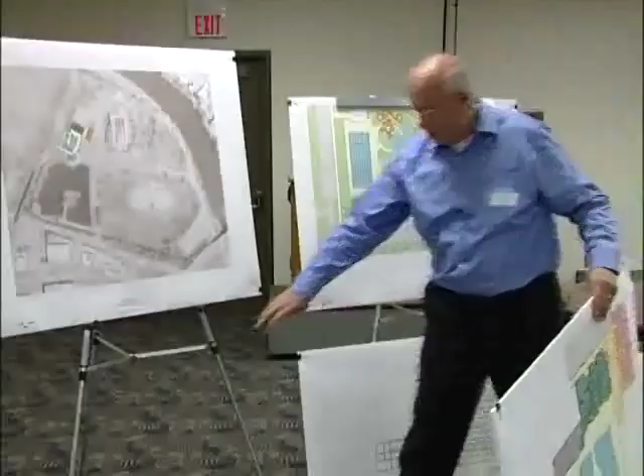As Donna said, we have 6 sites to go through. I know this will be hard to see, so I'm going to move this a little bit over to the center. Afterwards, you'll have a chance to come up and look at them closely, so if you can't see real well right now, you'll be able to in a bit.

The first one I'll start with is McCormick Park. There's a master plan that's been done for the park—that is this drawing here—and we are honoring that master plan with the work that we're doing.

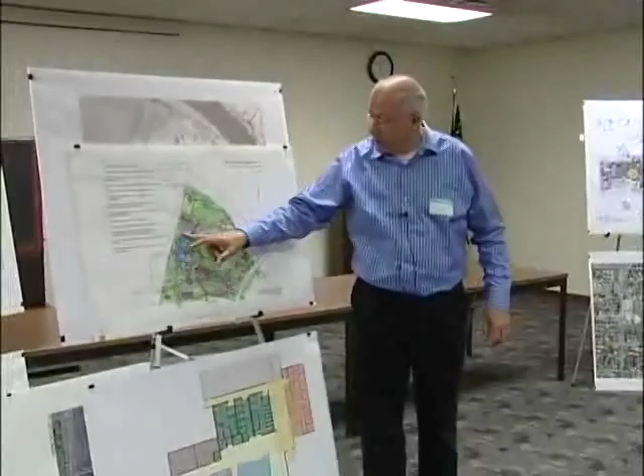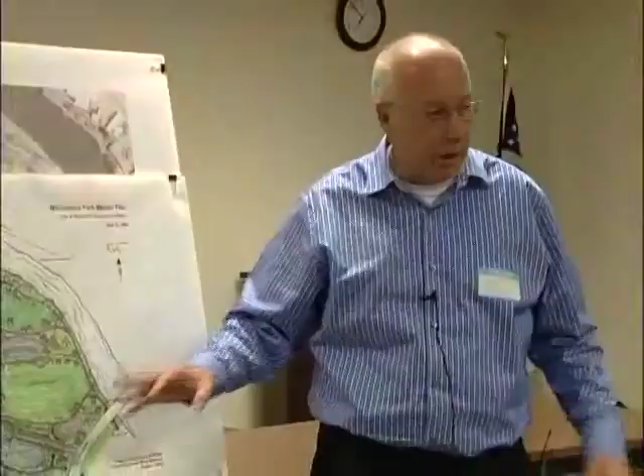The master plan indicates that just north of Silver's Lagoon is a site for a community center to be constructed, so that's the site we're working with. The reconfiguration and work of the park is not part of the work we're doing right now, but we're trying to respect that in the work that we're doing.

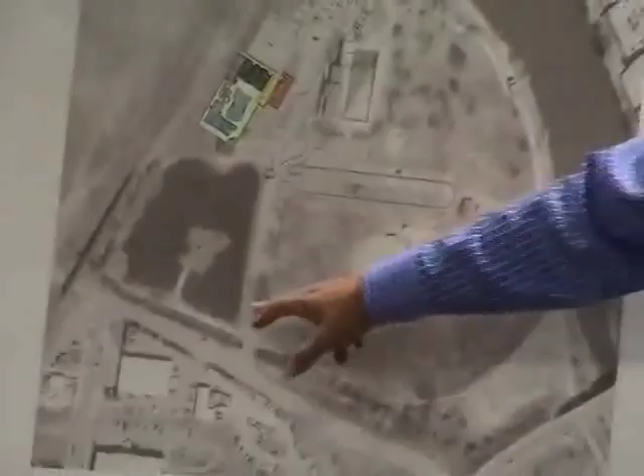So this is an aerial photo of the park the way it looks today, Silver's Lagoon. And here's the site to the north of Silver's Lagoon that we're building on.

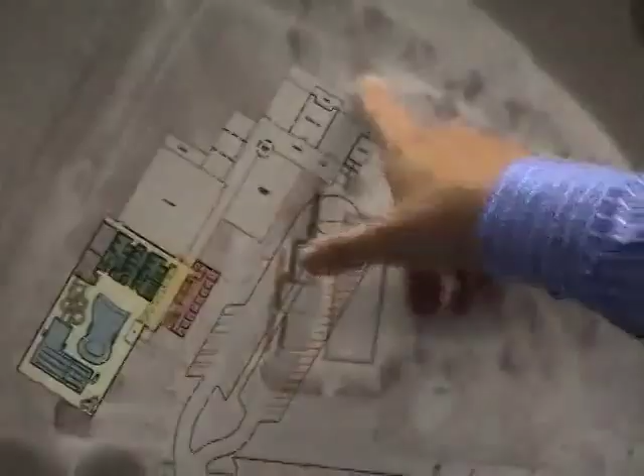Now this is a multi-part project, the community center. Right now in the aquatics referendum, there is money to fund an aquatics portion, but there's a vision of this being quite a bit more of a building in the future, with future partners coming from nonprofits and the private sector to partner up with the city. So what you see in gray is just a diagram of the potential for what can come later, and the colored is the part of the project we're doing now.

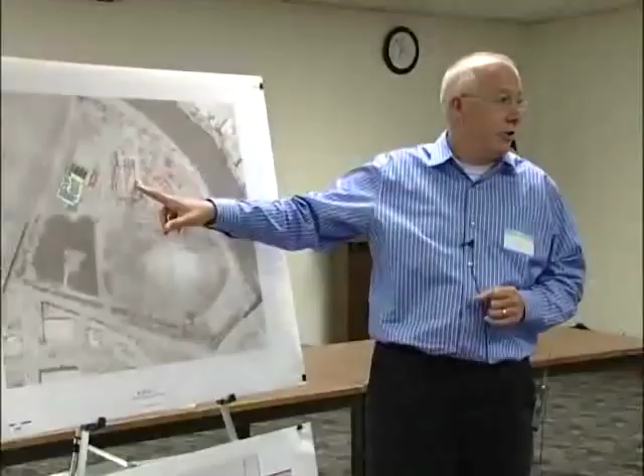So we've tried to work out some parking ideas about how parking will work in the future, using the existing asphalt and taking over some of the space where the current McCormick Pool is, because we want to preserve as much of the green space that exists today on the park.

So essentially, if you come into the park from here, the first piece you'll come to is the aquatic center. We've tried to locate it so it has a connection to Silver's Lagoon, with the indoor water features relating to the lagoon to the south. And then the future community center will spread up this way with a combining street or commons area. We've done some work on that even today.

But the major components we see in the future are the Children's Museum, a gymnasium, a cultural center, and the Boys and Girls Club, all of whom have expressed interest in being partners in the future as they raise funds and can be involved in the project. But for today, the major thing that we're doing is the aquatic center.

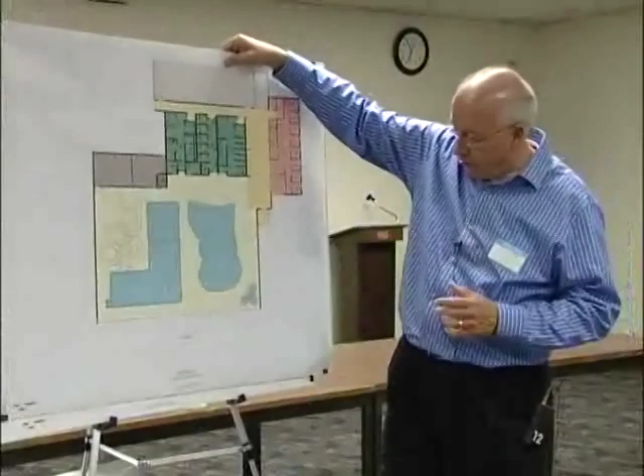So if you can remember from that drawing we just looked at, Silver's Lagoon is right down here. The aquatic center is about a 30,000 square foot building. It has two major components: the Parks and Rec department offices will be located here — this is going to be really the signature Parks and Rec facility for the community — and then a large indoor aquatic center here.

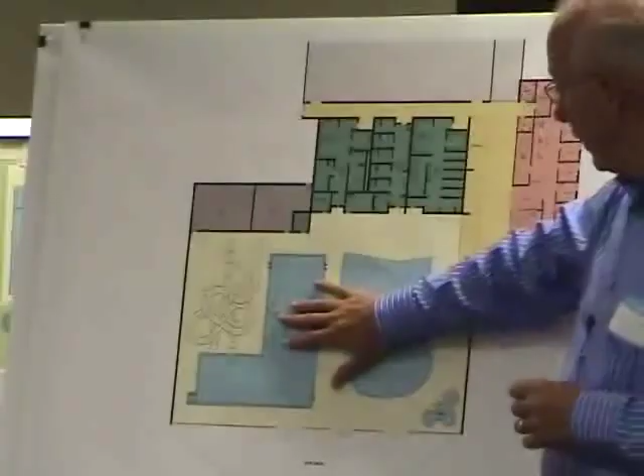As you come up to the building, you'll come from walks somewhere here into doors into a commons or lobby space right here. And the first thing you'll see as you come into the building is a view into that new aquatic center. We want to show off this exciting space right away.

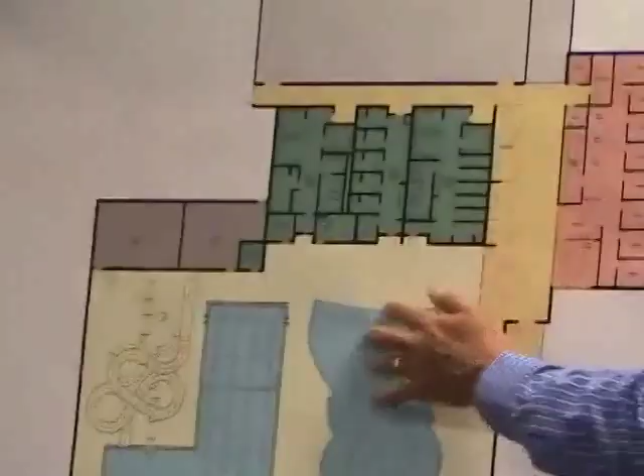And there's a place here for parents or visitors to sit and have a refreshment and then look out into the pool, particularly a good spot for parents who are bringing their kids in for swim lessons. They can sit and have a cup of coffee while the kids are doing their lessons.

This is the control desk. This is really the place that is the anchor for the whole facility, keeps track of everything that's going on. So if you're coming to swim for a day and you've got an annual membership, you might show your card. If you're coming just for one day, you'll pay your fee to come in, and then you'll pass into the locker room area here.

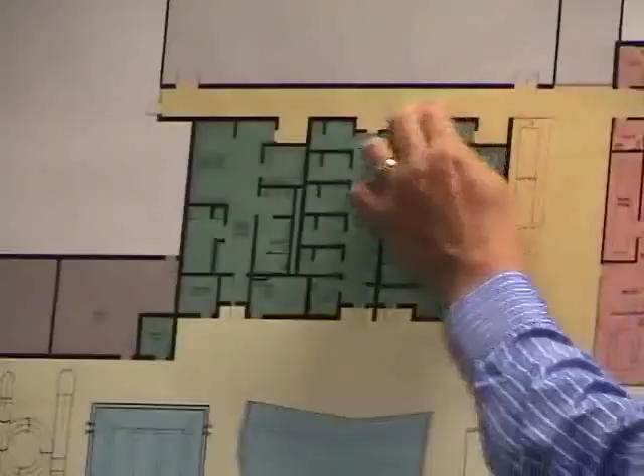We have three kinds of locker rooms: a women's locker room, a family locker room, and a men's locker room. The women's and men's locker rooms are ones like you've all seen before, but if you're not familiar with a family locker room, what they are is private changing rooms and showers.

We have 5 of them, so a family can go in — a mother can take a small son, or a father a small daughter — and not have to bring them into the men's locker room or the women's locker room. So these are private changing places right here, and then those feed directly into the aquatic center.

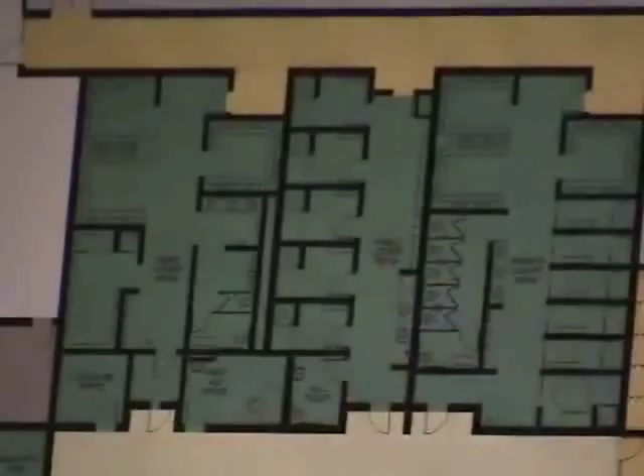Now the aquatic center is made up of perhaps 4 parts. This is the leisure pool, and if you haven't seen those, this is what's called the zero depth entrance — a beach-like approach to the pool that just simply slopes into deeper water. This will be filled with different play features, things that spray water, dump water, squirt water, things like that for the kids to play with, scattered in this area.

And then right here is what we call a current channel, so you can float in moving water. It'll kind of spiral around this.

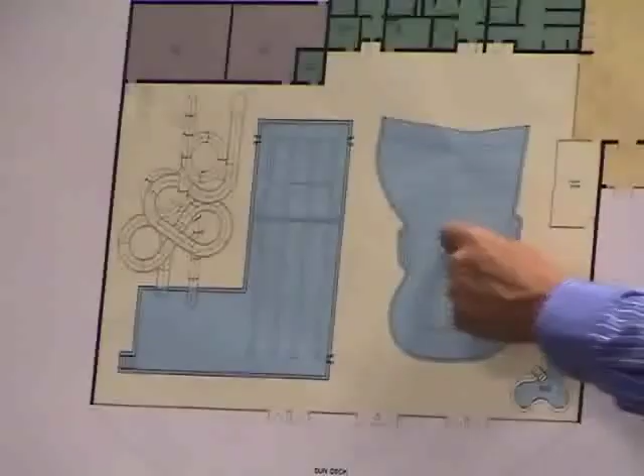And in the center is another place with a little bit deeper water, something like this deep. So we go from the beach to about 3 feet deep of water, with places to get into the pools there.

Then we have a spa in the corner, and this is really for the grown-ups. While the kids are playing in here, the grown-ups can sit in a hot tub. We've got that located by the windows to the south, and we're going to try to make that a

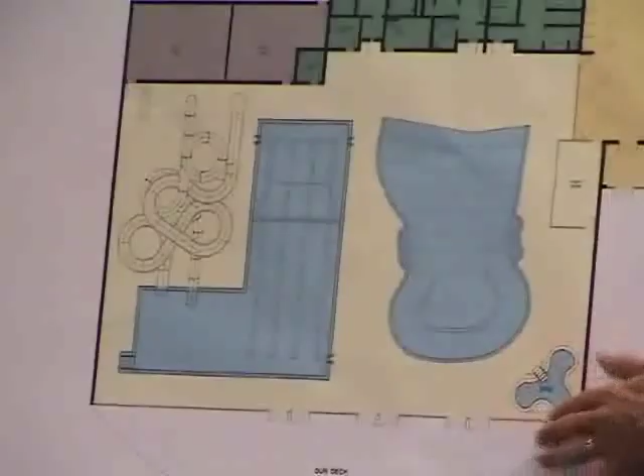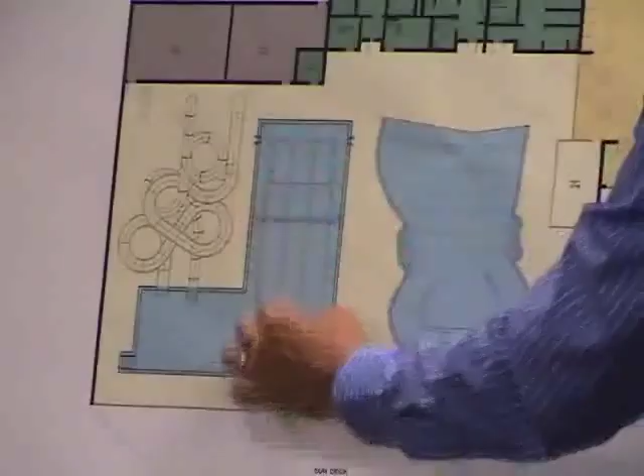nice sort of secluded area, a little quieter place for grown-ups to use. Then we have a competition-sized, but really a leisure lap pool. It's not meant for competition, but it's sized so that someone could practice and work out year-round in here. But mostly it's a general-purpose pool with a deep end for doing things like maybe a scuba diving class, and a shallow end that would be 3.5 to 5 feet deep for aqua aerobics classes or playing volleyball or basketball. It can also be used as lap swimming for people who want to for physical fitness.

Then the last feature is water slides. We have 2 water slides that drop into a plunge pool. One of those is an enclosed slide with a tube all the way around that you can go really fast in, and the other one's an open slide that you can take at a little slower pace, for different excitement levels. All of it is oriented to the south, so we get lots of sunlight into the space, and there's a nice open space for those winter activities.

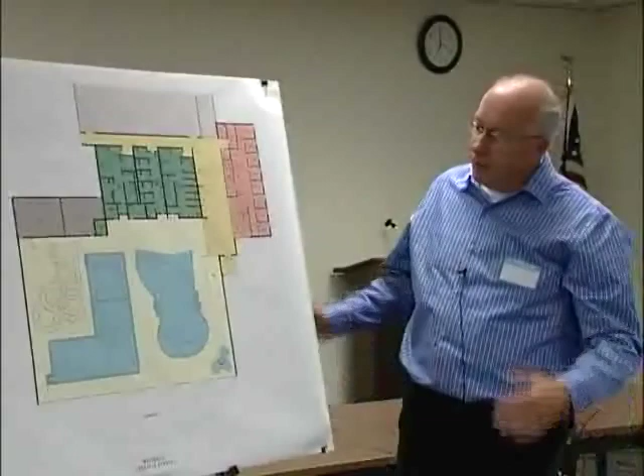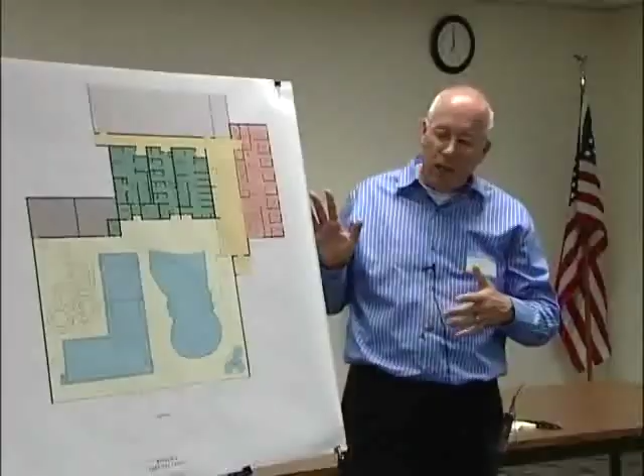We haven't quite worked out the character of these features or what sort of themes they're going to be. We're still working on that, but we've got now the functional layout, and you'll see that kind of throughout the work we did.

And then the last piece here is the Parks and Rec offices. Coming into the lobby, they'll have a waiting area right here so you can come in to the Parks and Rec. They have a conference room which will be a public use conference room, their offices, some workspace, and a couple of toilet rooms there. So they'll be really accessible to the public right here in the really key part of the city.

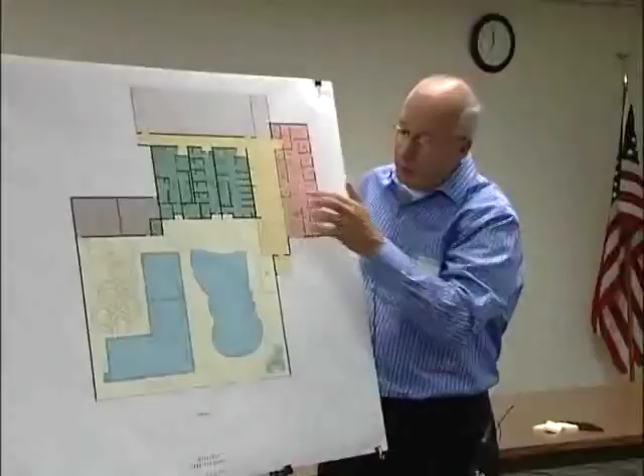And then this is that future part that goes up, and this will all connect up to here, and this could be the future gymnasium. So that's McCormick.

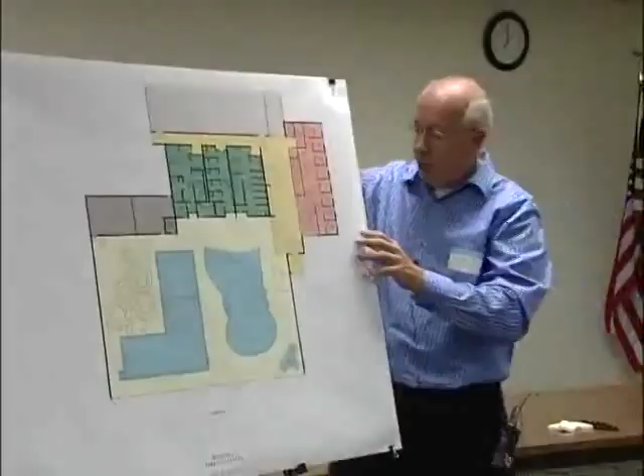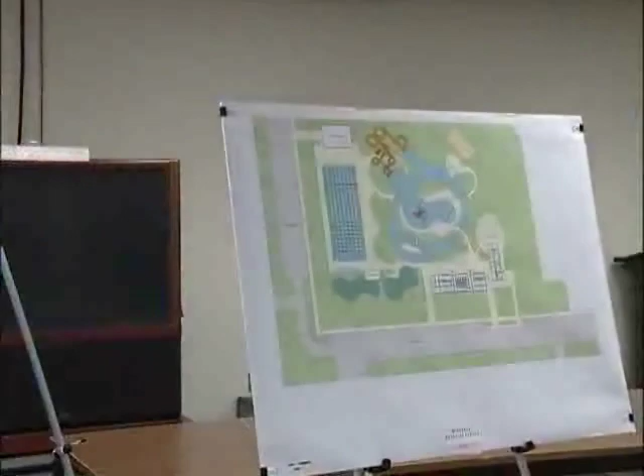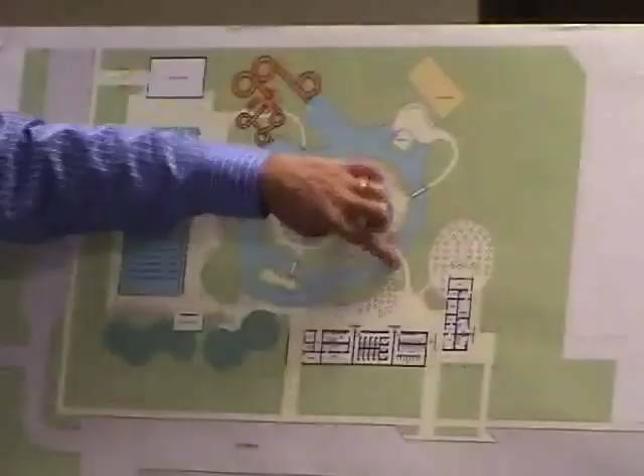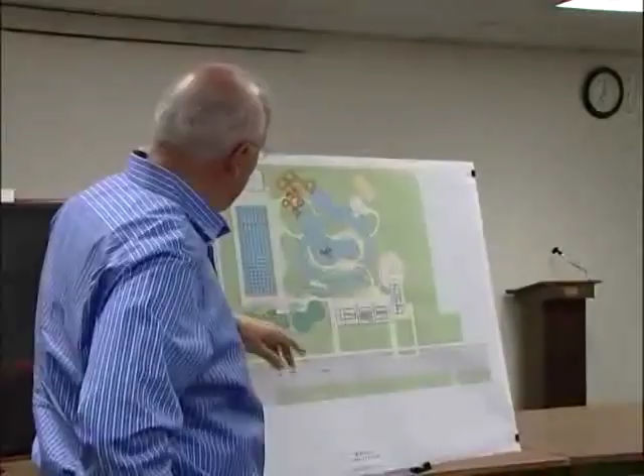But this is much more than what the Spartan pool is. We have lots of things going on here. We have this 50-meter competition pool, which Donna mentioned. We have a leisure pool, which is a complex of all kinds of different things—some play lots, volleyball, casual relaxing areas and things like that. So there's quite a bit here.

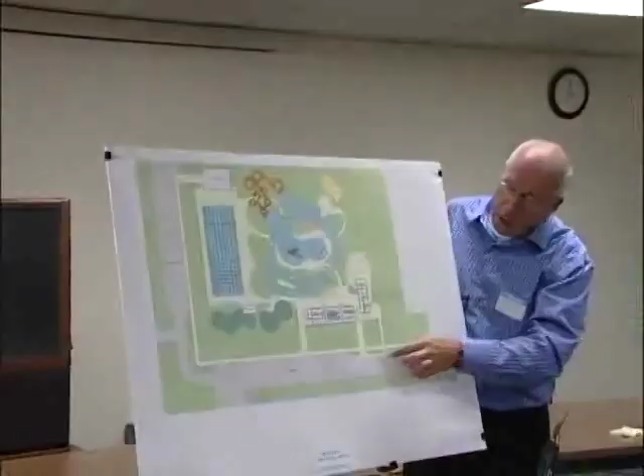And I'm just going to walk you through as if you came for the day and introduce you to what you can do here. So the main entrance is right here along that existing parking lot that we have today. You come in through a gate in the bathhouse building, that's what's shown here. As you enter, you would go to one of the 3 locker rooms, just like we have at McCormick. There's a men's, a women's, and family locker rooms here too. So again, little kids can be taken care of.

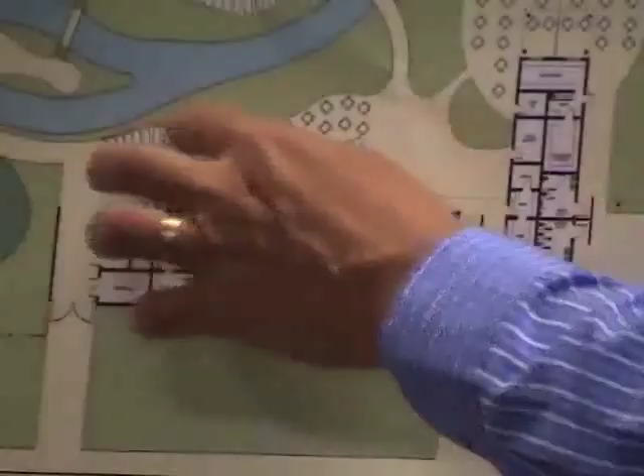We've got some support facilities right here. You could come in, change, and then find one of these deck chairs, that's what these are, or tables and chairs to sort of hang out for the day. You cross this bridge that takes you over what is a lazy river, which again has current in it that you can float on inner tubes, floating around this sort of circuit.

We actually have this as an island right here, and if you take this fork in the river, it's going to be a little more exciting—rapids and faster water jets, things that spray on you for the adventurous. If you like it calm, you can take this way and stay calm.

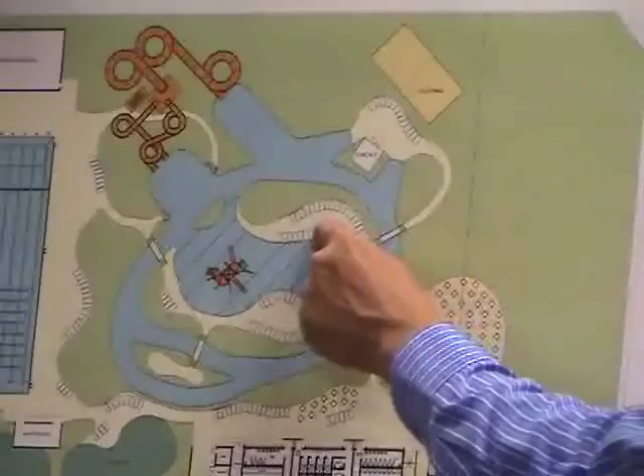There's a series of bridges that cross over that lazy river that goes around. The next feature is the leisure pool, which is this portion in the center. Again, that's that beach idea where you can just walk right into the water. It's surrounded like this with flat areas that you can walk right in, with lots of deck chairs on the beach surrounding the water for watching the activity.

Within this space, there will be lots of these active features that dump water, spray water. Kids can interact with them, squirt water, spray their friends, things like that. And that all happens in this area right here.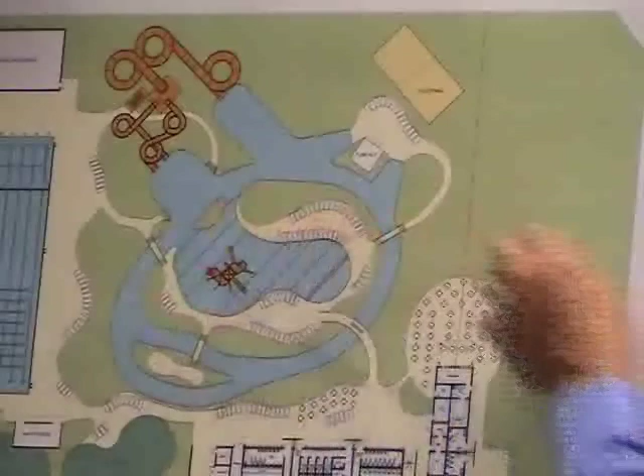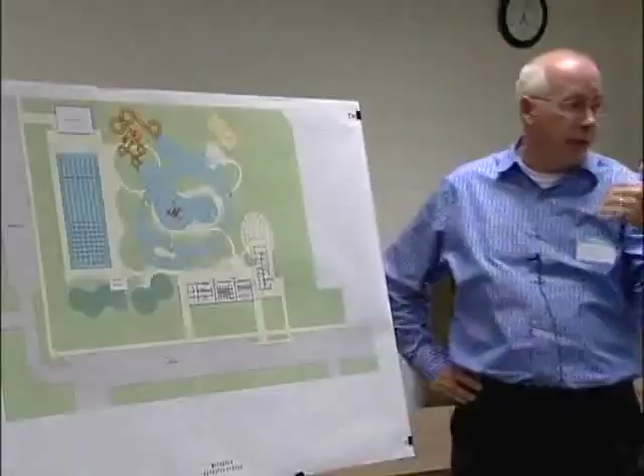Then the exciting features here are the water slides. We've got three of them this time, and one of them's an inner tube ride where you go up to the top and ride down on your inner tube, and then you can follow it around the river. The other two slides are an enclosed slide, a really fast one, and again a more leisurely slide that dumps you into the water here.

Then we have the competition pool to the south. This is an area that will be used for a lot of different uses again. Competition is the major reason for the 50-meter pool here, but there'll also be opportunities for all those things I talked about at McCormick—scuba diving, volleyball, basketball, aerobics classes—all those sorts of things will happen in that pool.

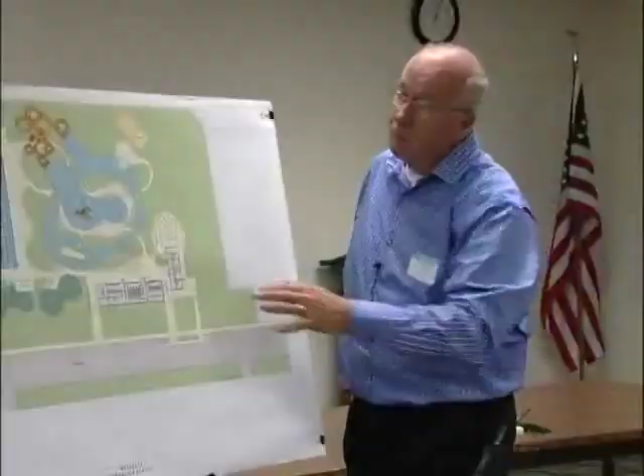A lot of it will be just about this deep, and it's a really large area for that. It's also set up so they can have competitions here.

So we envision that when there's a meet, this part of the parking lot will be taken over by the people for the meet. We'll have bleachers set up here so they can watch the swimmers, and sort of a headquarters scoreboard area right here for the people putting on the meet.

And this is the pool mechanical building to provide support for all the facilities within the park.

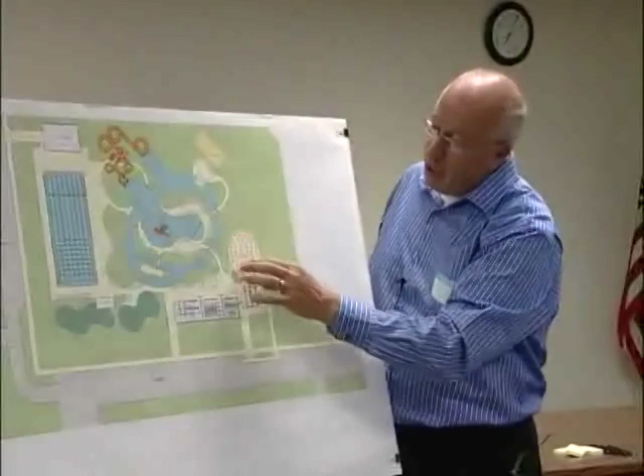A couple more things—we have a concessions area, this is what's shown right here. We have a concession stand that will have a wide variety of snack foods to have while you're there for the day. We've designed this so people using the park, particularly the tennis players or whoever, can come up to the concession stand and not have to go into the water park. This is a fence right here that separates that, so you can come up and get a refreshment.

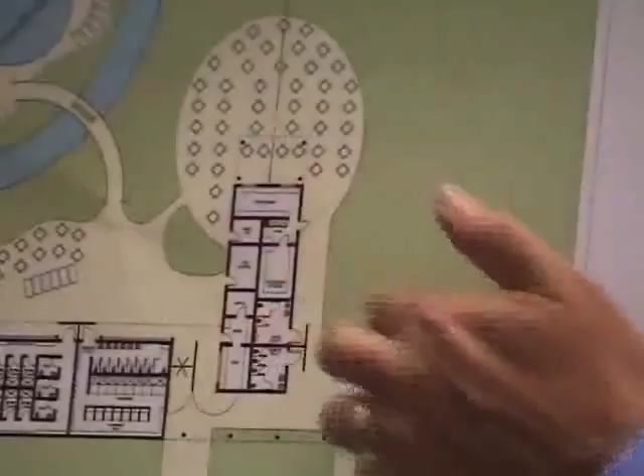We also have added new public toilets to the park, so again, tennis players and other people can go and use these toilets and don't have to come into the water park.

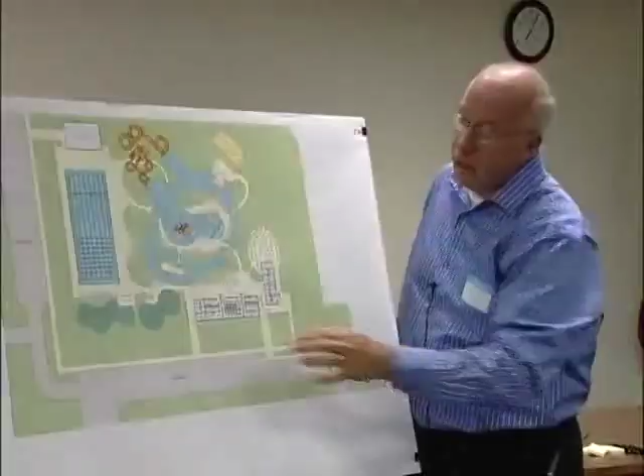A tot lot for the little kids to play in and out of the water, so they've got a couple different things to do. A volleyball court for the older kids and adults to play, and then a passive area here for people who may take their kids to the park but really not be so excited about being there—a little place they can get away.

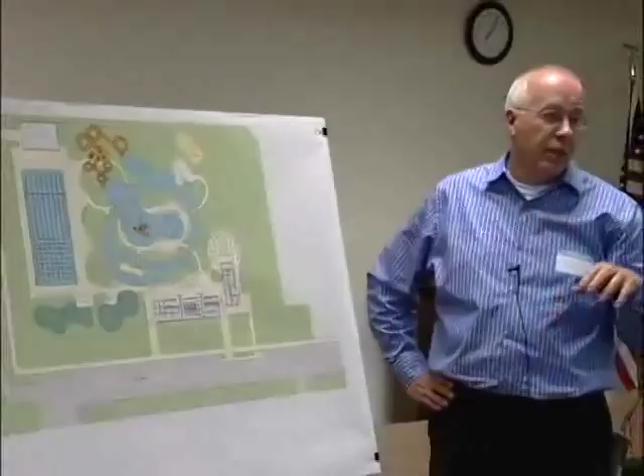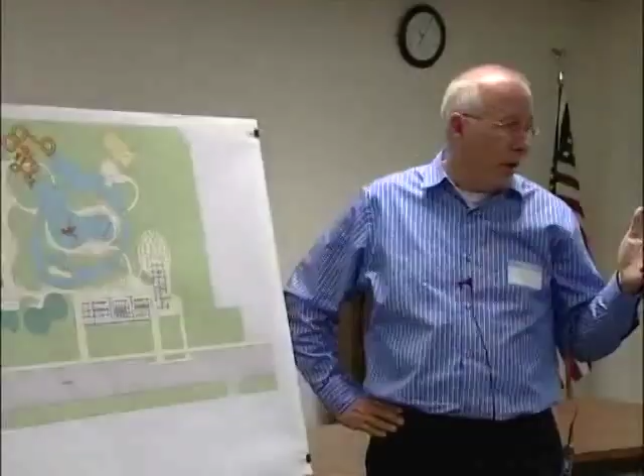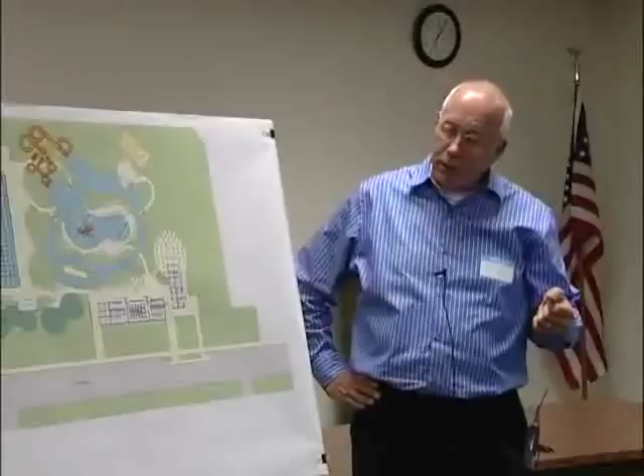And then also a party room. One of the most popular things, and I forgot to mention this at McCormick, is we have a party room, which is really great for kids to have their birthday parties and other kinds of things. So at both places we have party rooms, so a kid can bring all his friends, have pizza and cake, and then go swimming as part of that. This also will be used as a classroom for lifeguard training or other kinds of classes that might be held at the water park. So it's again a multi-use space.

Let's see, what else should I mention about this? I think that covers most of this right now.

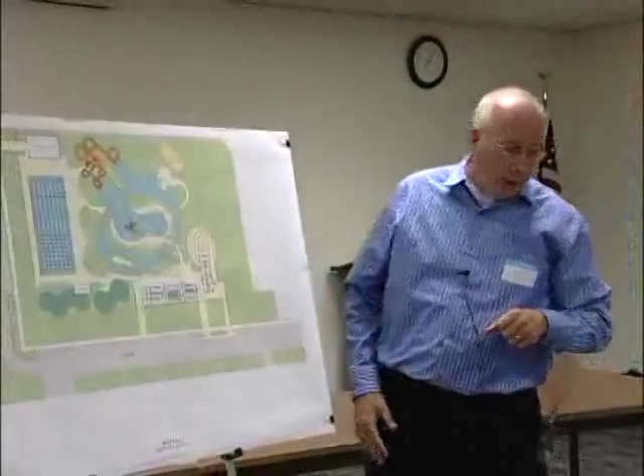Then the last thing I have to talk about is the 4 different neighborhood parks and the spray parks in those. The work hasn't been developed as far on those as the other 2 facilities.

What we've really done so far is looked at where within the existing parks a new spray park should go and what theme each park should have. Those are really the 2 things we've accomplished so far. We haven't really designed them very far yet, we've just gotten into that.

In the charrettes we had with the public, and a lot of those folks are here, we talked a lot about lots of different characters the parks could have, and wanted to make sure each park had its own unique new feature, rather than make them all the same or all generically tot lot places. So we've worked at, 2 of them are based on literature themes, and 2 of them are based on natural themes.

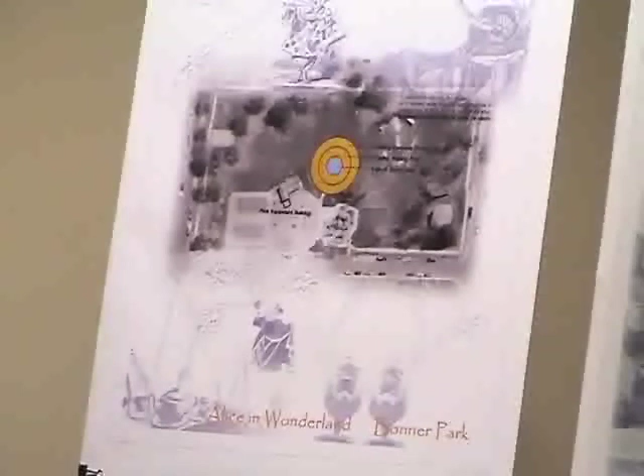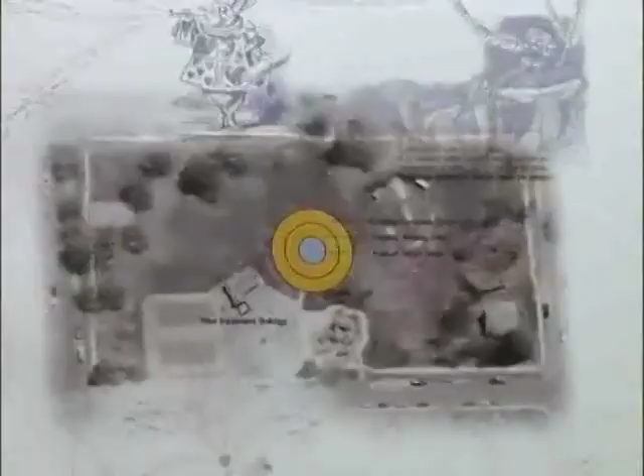At Bonner Park, we've selected Alice in Wonderland as the literature story to be used as the theme for that spray park. Accomplishing that theme is the job ahead, but we've shown just some characters from the story of Alice in Wonderland, them squirting water and things like that, just to give you an idea of what the goal is.

Now, within the park itself, here's Bonner Park. If you're familiar with it, you know the existing wading pool is right in the center of the park. That was determined to be the best location for the future one, so we're going to build it right where the current one is. It will be quite different.

If you're not familiar with spray decks, they don't have any standing water. The water goes into drains and is recirculated, filtered, cleaned, reheated, and sent back out to the things that spray. So it's really a playground with just spraying features in it. We're going to get 6 or so spray features in each park and work those in.

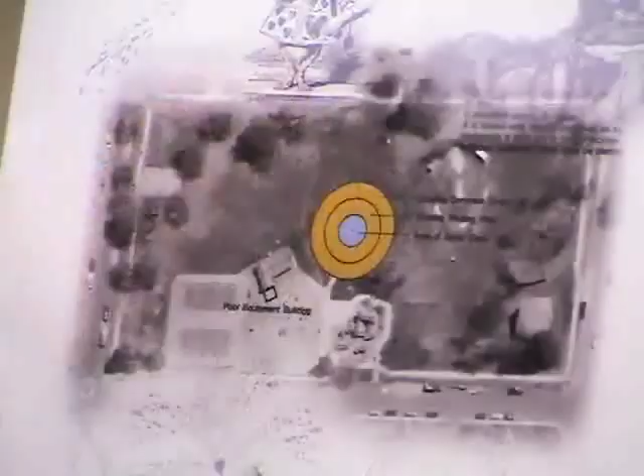So that's the area that will be located. Some of it will be dry space and some wet, and we've shown the quantity of wet versus dry space because you space these different features out. So at Bonner, it's about Alice in Wonderland and reinforcing the current design of the park with the new spray deck on top of the current wading pool.

The next one to talk about is Marilyn Park. This is a relatively undeveloped park at this time, so we kind of master planned the whole park for its future development. Here we came up with a theme of flora and fauna, which is really about nature, the little creatures, the grasshoppers and squirrels and frogs and turtles, which is what started the whole discussion from the original turtle ponds we have. So this is themed maybe for the smaller kids in mind for that neighborhood.

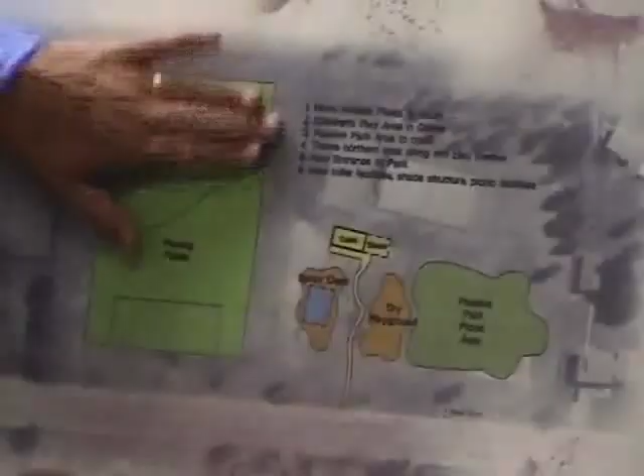Currently, there's a large sloping field at this end of the park. There's a rather poor baseball diamond at the upper end, some tennis courts, a basketball court, and just a swing set and a couple other features right in the center of the park.

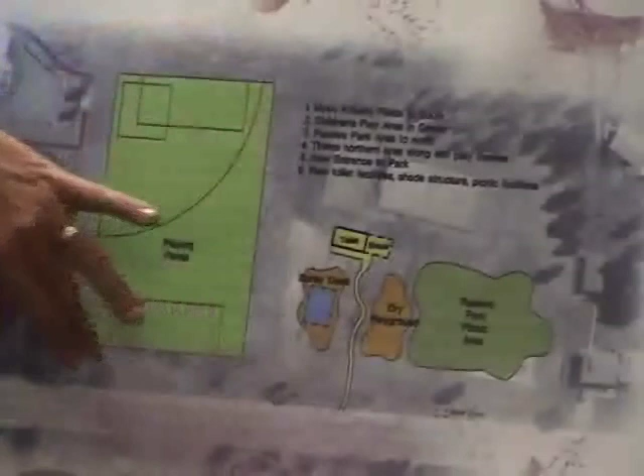So in the new design, the north end of the park will be playing fields - we'll slope and flatten this land off a bit to make a good soccer-sized play field with a baseball play field overlay. And then the upper portions of the park will become passive and toddler areas.

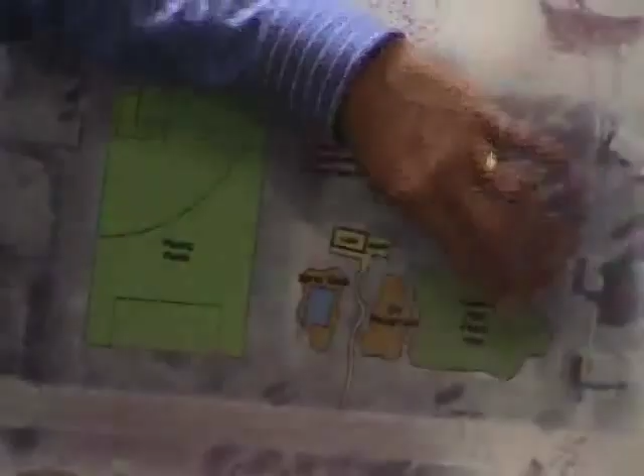So we have a picnic, passive park area up here, replacing this ball diamond, which is in a dangerous position next to playgrounds because of flying balls in the outfield. A future dry playground here, a tot lot if you will, and then the new spray deck right here with kind of a new entrance to the park.

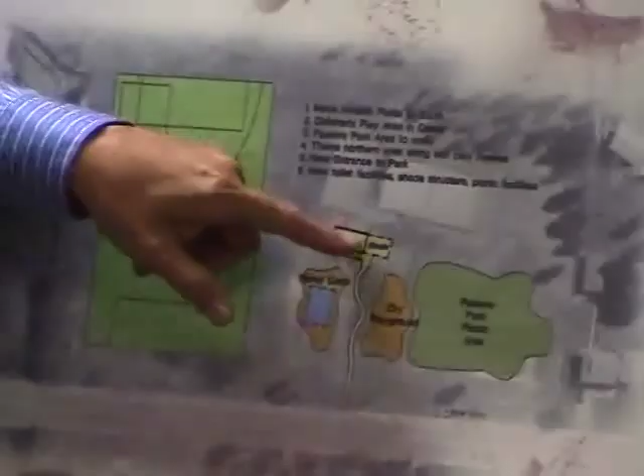If you've been there, you know there's a picket or split rail fence, and we'll try to make a gateway into the park here, with a new toilet building and some kind of shade structure. Each of the spray decks will have a toilet building and a pump house to reinforce those. Bonner's already exists - we just have to add on the pump house for all the filtering equipment.

This one will have to get a new structure for toilets. But the spray deck will be here, and we're going to try to bring in woodland and meadow creatures to give that character and a theme for that park.

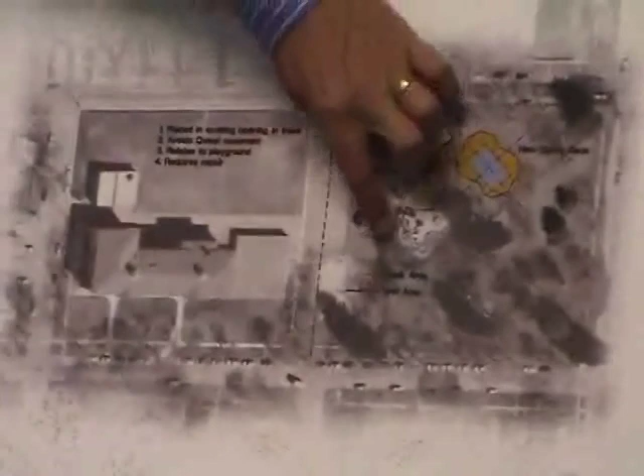The next park is West Side. If you're familiar with West Side Park, the current wading pool is right here next to West Side School, and there's a major play structure in the center of the park with a castle theme. So the theme we took here from literature was Robin Hood, of that era of medieval castles, to reinforce the castle theme already there.

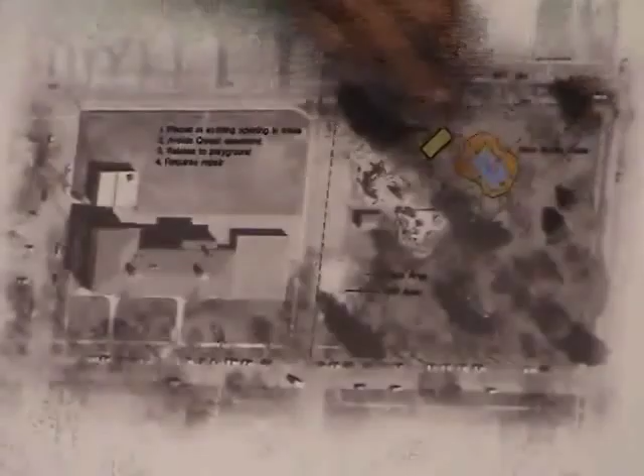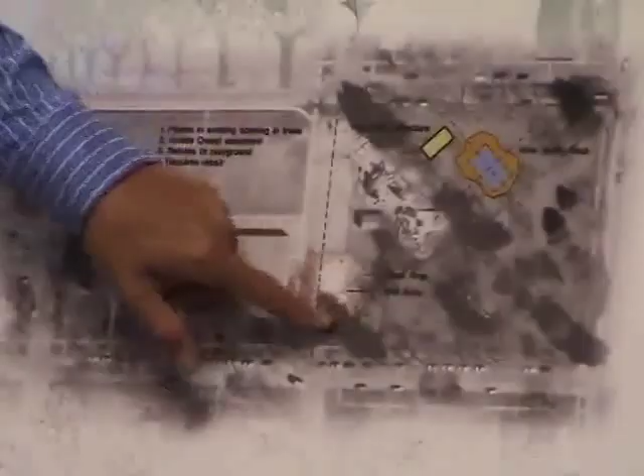We've relocated the spray deck to this portion of the park for a couple of reasons. One, this location has an underground easement for the telephone company right beneath the current pool, and we don't want it cut up someday because they have to replace a telephone line. Also, this area is very shaded, with trees encroaching, so there's more open space to this portion of the park. We can move it over there, get it away from the school, and have more sunlight on the deck.

We would also need to build a new toilet structure here because the current one's in very poor condition. At this phase we'll be putting in a temporary changing area, a fenced off space with showers, an outdoor shower, but not a full bathhouse. That's something to be done in the future, a new toilet facility right here. The spray deck goes here, and we're going to work Friar Tuck and Robin Hood and all those folks into the theme of the park.

The very last one is Franklin. Franklin has its current wading pool right in the corner here at the intersection. After reviewing the park and looking at lots of options, we thought that was still the best place for it, right at the corner, but we wanted to make sure it was a safe and good place. So we're going to look at the fencing issue around the corner, so we don't have little kids running out into the street, and new entrance locations into the park. It's a really nice setting the way it is today, but we want to make sure it stays a very safe place for the kids.

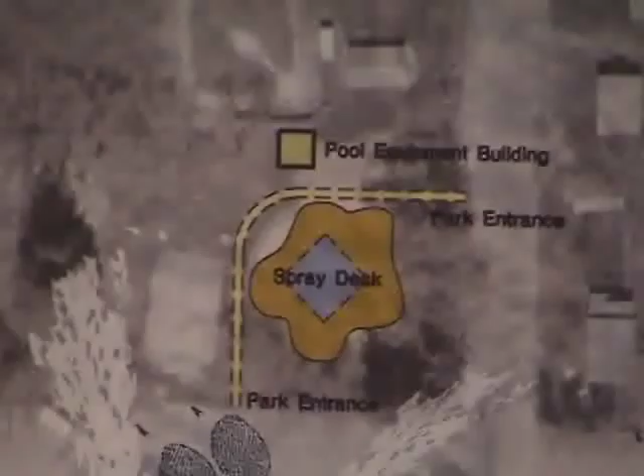There will be a pool equipment building added onto the current toilet building that's there already, because that building's in good shape, so we can just add the plumbing needs of the spray deck to it. This one's based on a natural theme, nature again - rivers, trails, and tracks is what we've called it. What came out of the charrette process was about the rivers in Missoula, the Clark Fork and Bitterroot, the animal history, the natural history. So we talked about trails through this, elk or bear, those kinds of things, or Lewis and Clark and the trails through the area. This one will have a theme based on nature and that sort of thing.

If citizens are interested in learning more about any of the splash decks or the two major aquatic facilities, we'd encourage them to call 721-PARK. We'll have schematic designs posted at our website. Welcome to make comments, ask any question that you have in mind.

Also, I think it's important for citizens to realize there is a fundraising group out there called Swim Missoula. We encourage you to support that group, because that's the group trying to raise $1.4 million to add the 50-meter competitive pool to Playfair, which will be a wonderful venue for our community. There are fewer and fewer of these large competitive pools across the nation, and Missoula could truly be one of the unique communities that maintains that level of competitive swimming right alongside the great leisure type facilities geared more toward the recreational swimmer.